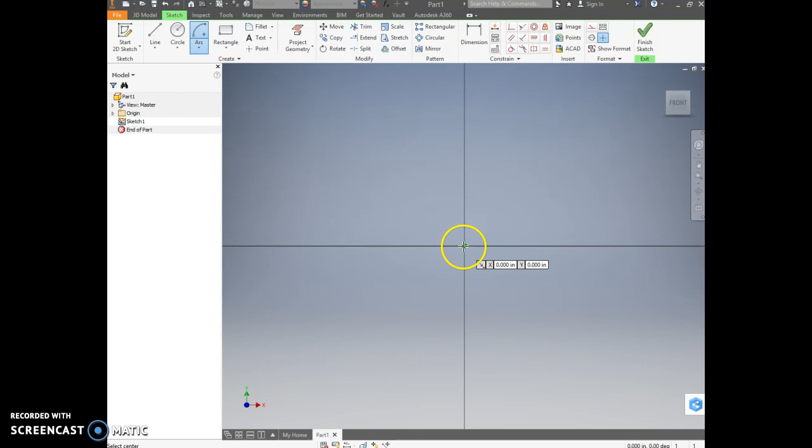I already selected my sketch to start, and I'm going to be beginning by using a center point arc. I'm going to click on the origin, that's that yellow dot in the middle, to place my arc. And I'm just going to roughly sketch out the outside of my shape. That's going to represent the bottom of the pear.

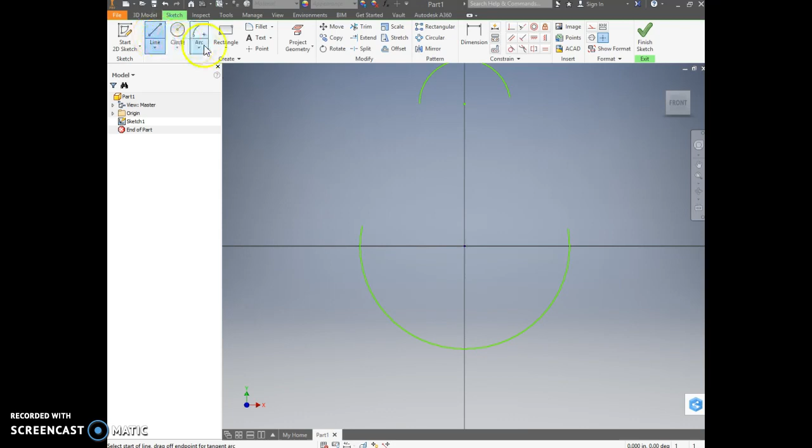I'm going to do a second center point arc on the top, a little bit smaller, to represent the top of the pear. And then I'm going to connect it using lines. Now you'll notice when I first connect my lines, it's not really a smooth curve like it is in the picture.

So we're going to use some geometric constraints to even that out. I like to use tangent. Tangent's going to smooth the lines and the curves so that they just touch at a nice angle, even point. You'll notice in that one I got a little gap there. I'll show you how to fix that in a minute.

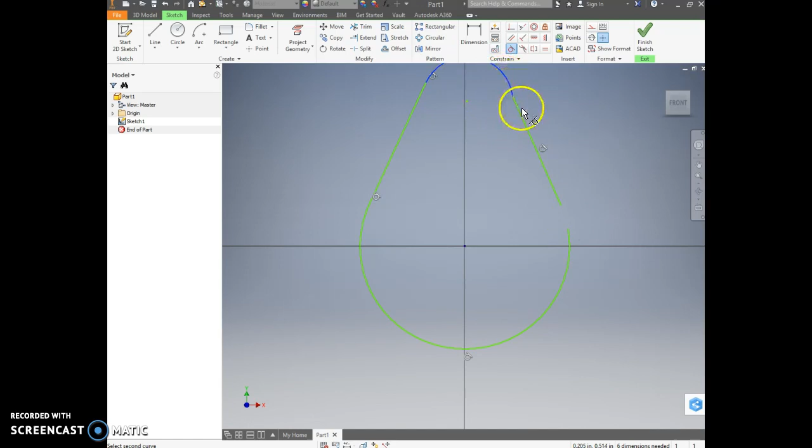So if you were like me and you got a little gap when you opened up your piece, there's a tool you can use called coincident. The coincident tool lets you select 2 points that you want to touch, and they'll extend the lines so they're connected.

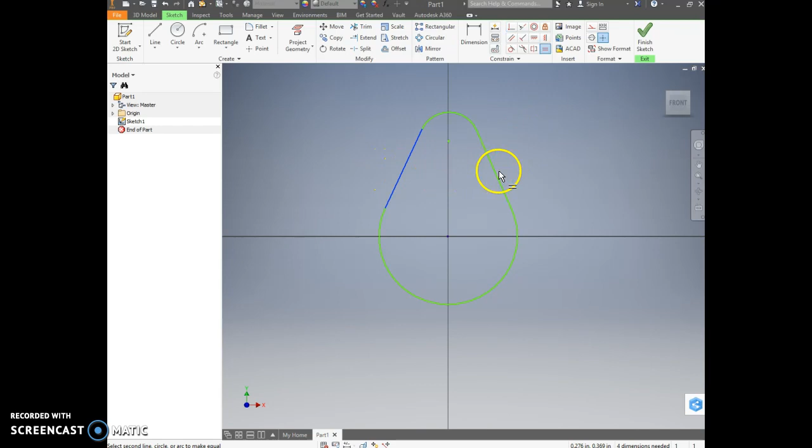I also want to make sure that my left and right lines are the same length. In this case, mine already were, so that's fine. And now I'm going to start adding in my numeric dimensions.

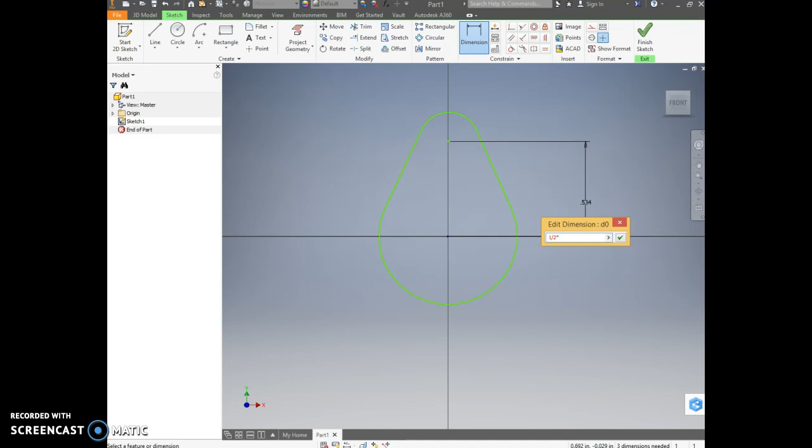The first thing I'm going to dimension is how far away I want my 2 center points to be from each other. And on my paper, it says that it should be 1/2 times d. So I'm going to type in 1/2, and then the asterisk represents multiplication in Inventor, and then my diameter, which was 2. You might have a different number for your diameter.

Notice that Inventor will calculate it for me. I'm just going to recenter that. That's one of the nice parts about Inventor, it can work as a calculator.

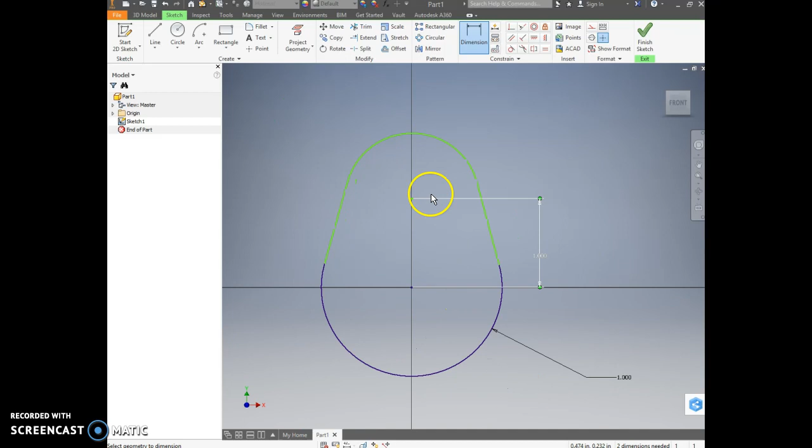I'm going to do the radius of my bottom arc next, and it's the same thing, 1/2 times my diameter of 2. Then I'm going to do the top arc, which this one is 1/4 times the diameter of 2.

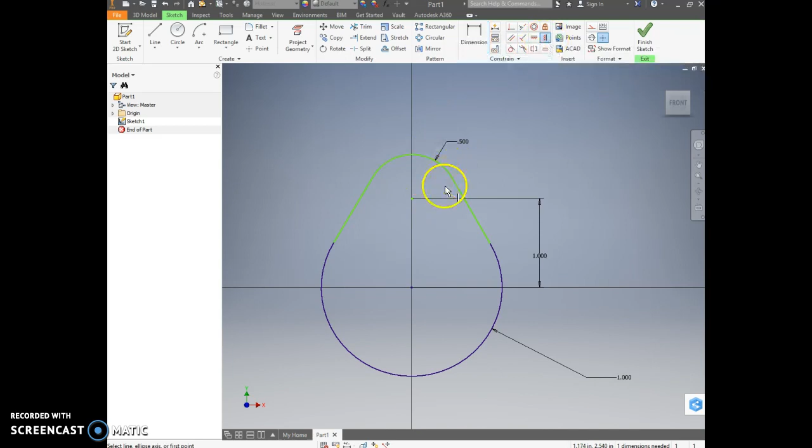The final thing, I still need one more dimension. It says down in the corner, and it's probably because I have not taken the time to center this little point right here. I'm going to use the vertical constraint to make sure my top and bottom points of my arcs are perfectly lined up. So I'm good there.

And then final thing I need to do is add in the circular hole. And that has a diameter of 3/16 of an inch.

Let's see, it says I need one more dimension. Let's check and see. I'm going to make sure that my circle center point is centered.

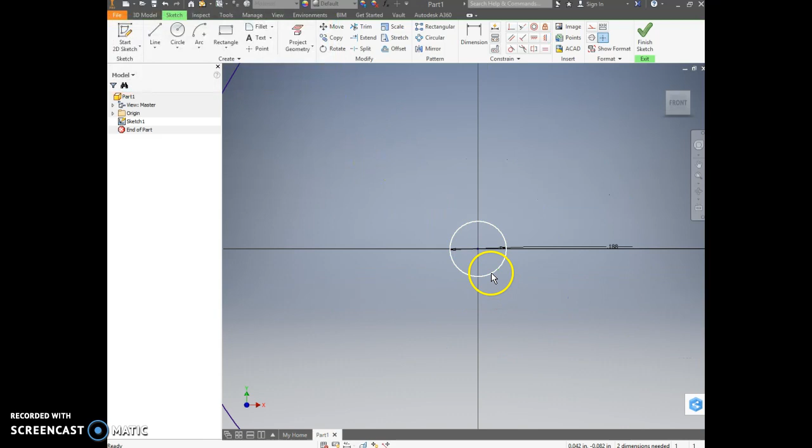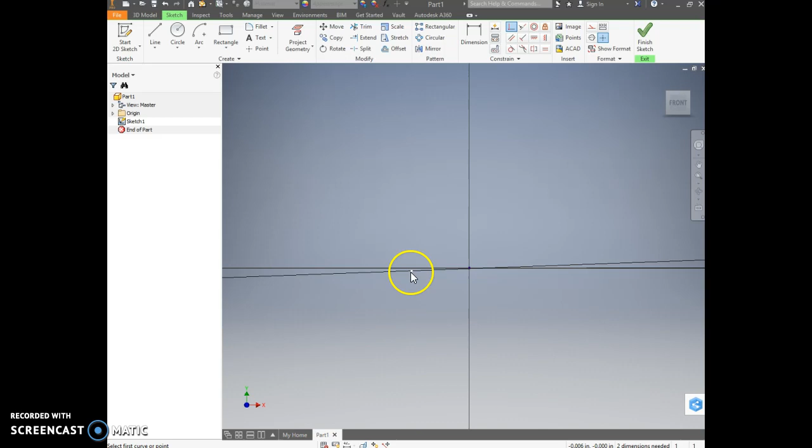One thing you can do if you're having trouble finding, like I think on mine, my center point of my circle isn't quite, there we go, not quite constrained to the center. So I just zoomed in so I could see that better. And I'm going to use the coincident constraint to align those a little bit better.

Now everything's blue. It says fully constrained. So I am ready to extrude.

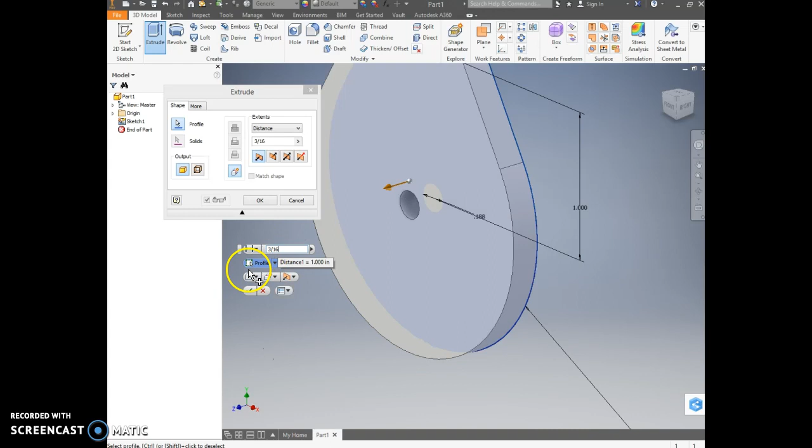Keep in mind, that on this one, I only want to extrude the outside, not the hole in the middle. So I just click on the outside profile. And then that's going to be 3/16 of an inch. Good. And from there, I have my completed pear cam.